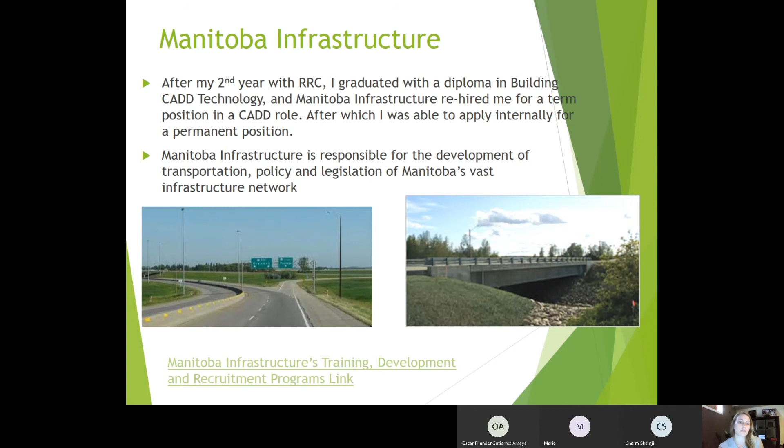Manitoba Infrastructure is broken down into 8 different areas. I work within the engineering and operations division, which is broken down into 9 different branches. My branch is construction support services.

Construction support services provides expert and experienced internal technical training, consulting, research, and evaluation services that ensure consistent quality and fairness in the delivery of highway construction projects.

Some of the services we offer are internal survey support and training, internal GIS and CAD support and training, survey technology research and design, construction audit and quality assurance, and we also have the training, development, and recruitment section under our branch as well.

When I first started with construction support services as a geomatics CAD technician, I was provided various internal training for CAD, GIS, and survey, to understand the processes of the programs that Manitoba Infrastructure uses to complete their jobs.

Now my position as a civil design technologist, this is my permanent position that I've had for the past 8 years. I perform technical development and research related to computer-aided design and drafting software.

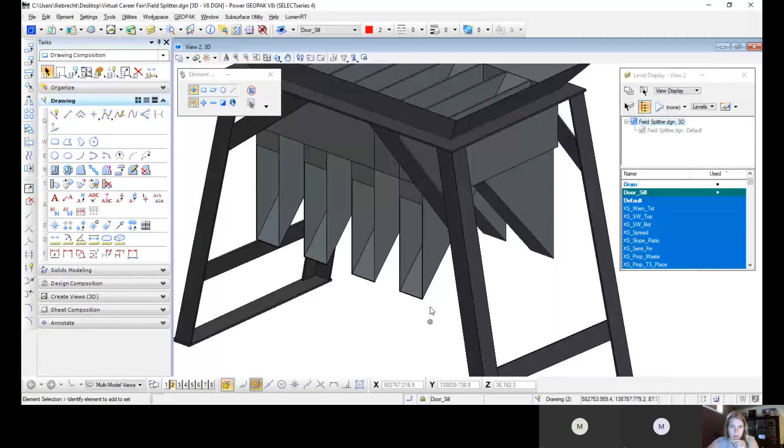I just typed it up into the chat there. I was just wondering if we were supposed to be able to see some drawings, that 3D drawing you were showing. I couldn't see anything, I could just see your slide. It didn't come up? Not for me. I don't know if anyone else saw anything. Okay, let me try again, because I can. How about now? Yes, now I can see it. You saw the PDFs though? Did you see the PDFs? I didn't see anything, I just kept seeing your slide, and I was like, am I supposed to be doing something? I could redo that, maybe, just because it is recorded, and then it'll be there for people to view. So maybe if you can just do that part, because I don't know if anyone has a question, because I feel like one was just the tech person, and now it's just Lori there. So maybe if you just want to do that so that if people are watching the video, they can actually see what it was, if you don't mind. For sure, yeah, no, I'll do it. Okay, and I'm just going to mute myself again then. Okay, so can you see this map?

Right now, I just see your desktop, and it shows your files.

Okay, there's a map. You see it now? Yes. Okay, I should have tested that part too, I guess. Yeah, that's okay. Okay, so this is a map.

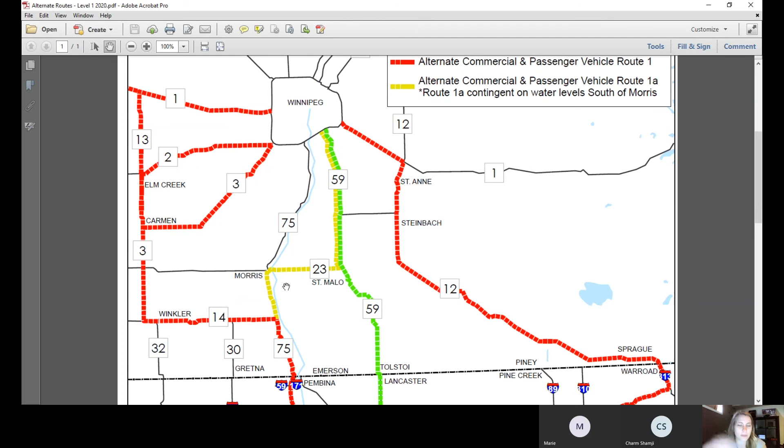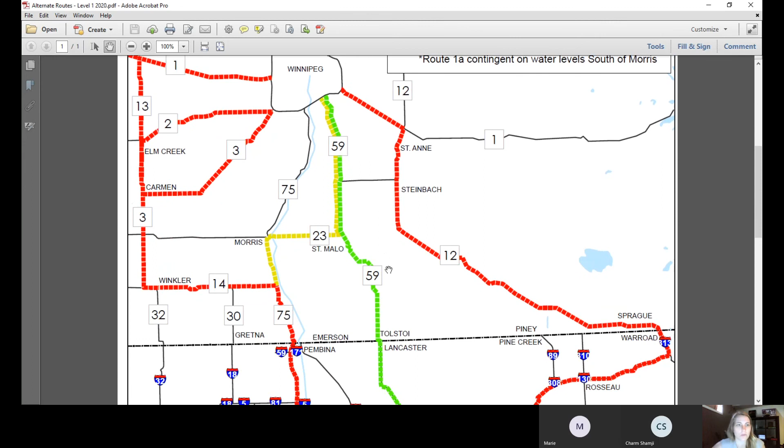This is the flood map that I was talking about. It shows the alternate commercial and passenger routes for when the flood was going on this year. The south part of Manitoba was more flooded than any other part, so they show different routes. I use geographic information systems to create maps like this, to produce them for floods, to send out to different areas of Manitoba so they know which routes are open and available.

Okay, let me try another.

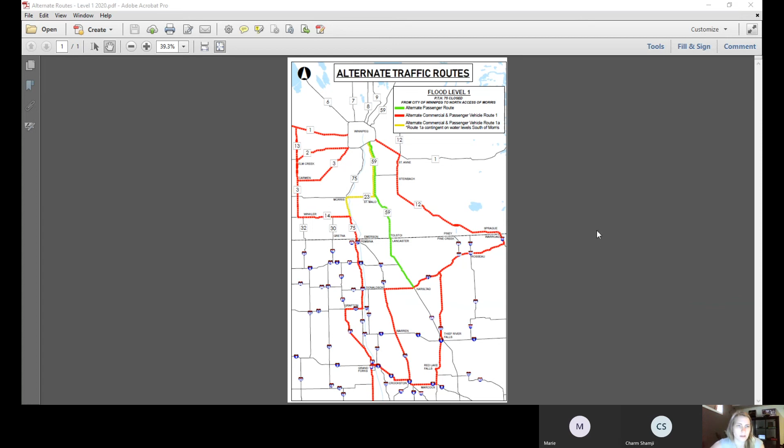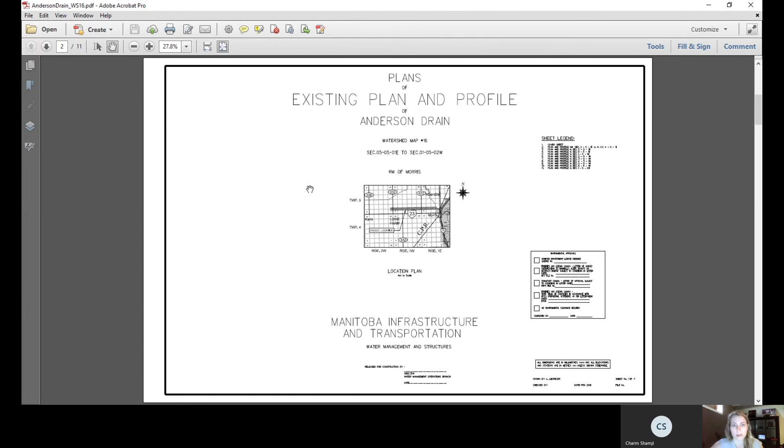Okay, so this one is the drain that I was talking about. This is more likely the project I would be working on day-to-day. It's a drain plan showing various parts. The site plan at the very top shows different details about bridges and culverts, and the location of certain things from a top view. Then we can see a profile view of the bottom of the drain and some bridges and culverts on the left and right side of the drain.

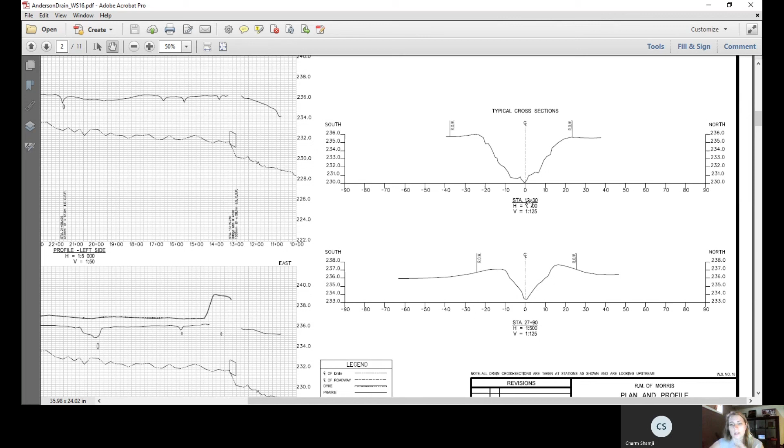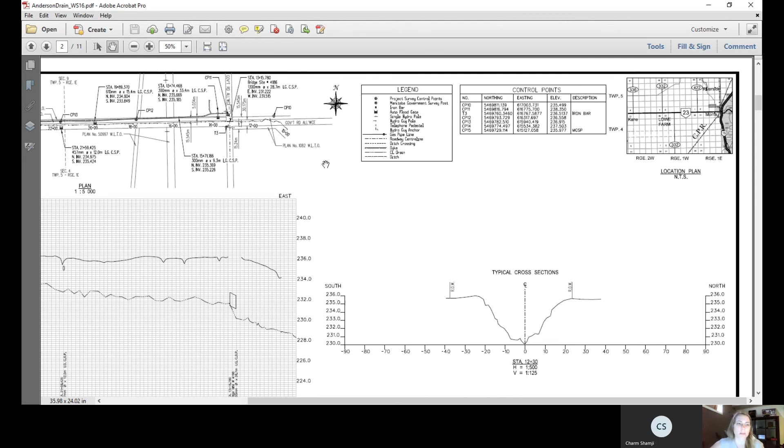Then typical cross sections, so you cut the drain and can see the banks on each side and the bottom of the creek. And then just a site plan showing where it falls within Manitoba. This one has a variety of pages because the drain was quite long. So that's a typical type of job I would do. This one's for water management.

Let's see other projects that I have. I'll bring up the 3D ones here.

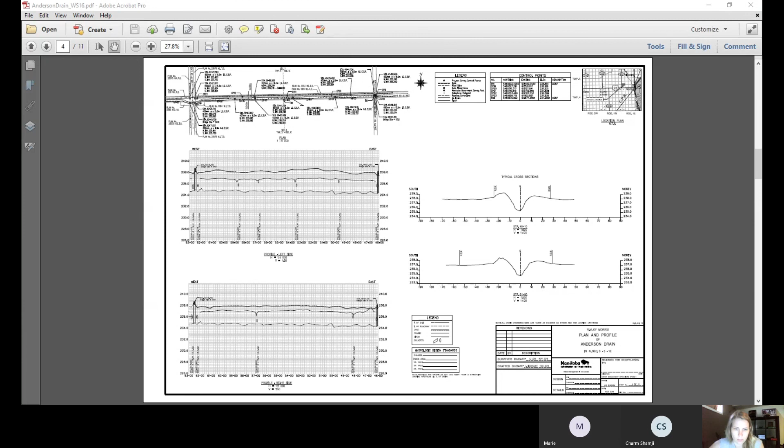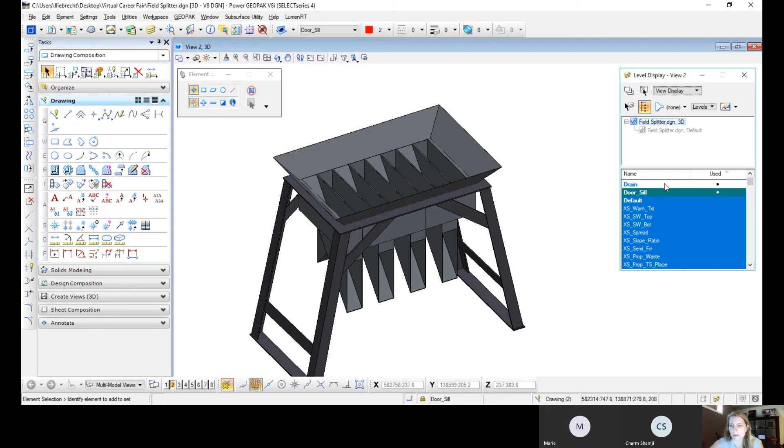So this one was the field splitter I was talking about. It's just a little 3D model I did for somebody who requested it because they were going to have it built. We're on the wrong side of it, but we have measurements and everything for the person to use, so they know how big all the parts of it are.

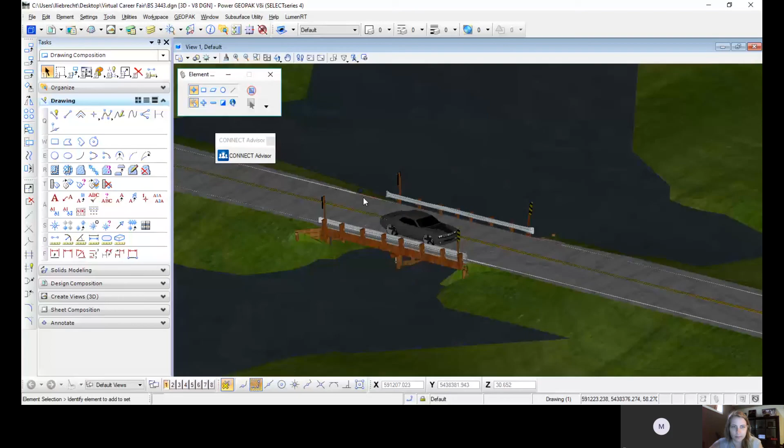So that's one. The other 3D drawing I've done - it was picked up by LiDAR, surveyors used LiDAR to pick up this data, of the land that runs all the way along this creek and the roadway that runs across it, and also this bridge here.

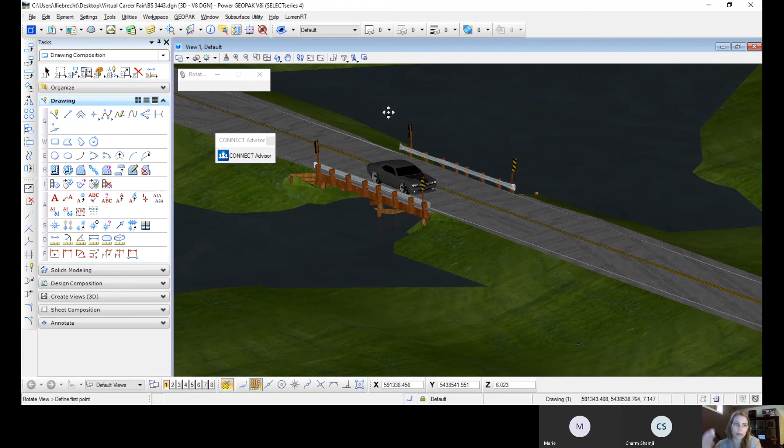I took all this data and brought it into the program we use, which is MicroStation, and created a 3D model. I did not create the car, which is what I was saying earlier - the car is just something you bring in. But you're able to create these 3D objects within MicroStation, and you can render them to have certain materials on them, so you can see the wood, the grass, the guardrail, and the water.

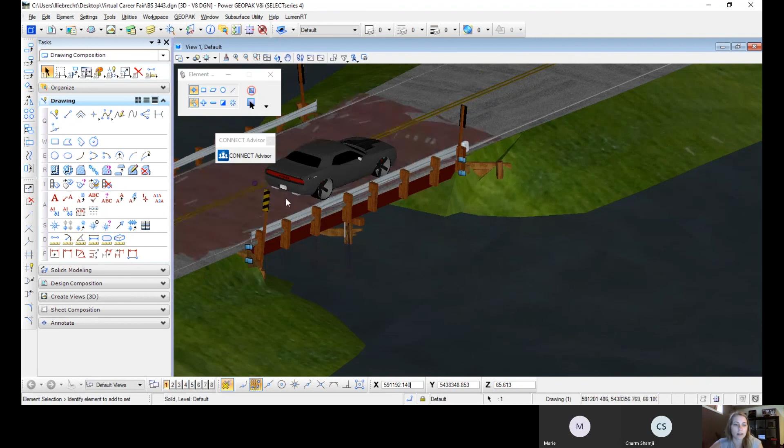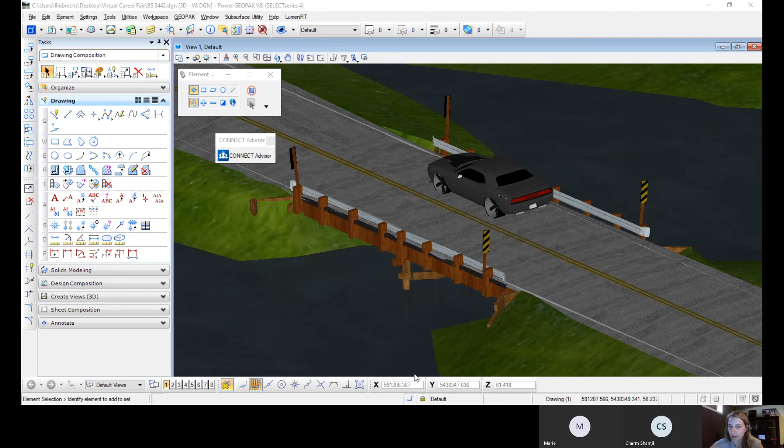So that's a little bit more of a fun project, because it's a little bit more dynamic than just a 2D site plan, profile, and cross sections. Hopefully everybody was able to see that this time, but that's all I have. So if anybody wants to ask any questions now.

I will ask just a couple questions. For sure, I feel like I ran through that very quickly. That's okay, because I think you talked through it before, and maybe I should have interrupted initially and said hey, I don't see it. And then maybe it would have made - but anyways, we heard it and we referred back to it, and thanks for doing that.

You had mentioned that when you were at Red River and took your civil engineering technology program, there was a co-op program. And what I'm wondering is, do you feel as though that co-op program was helpful, being able to take what you learned in the classroom and apply that knowledge to the workplace? Was that beneficial? Very much so, yeah.

So the way they set it up is they have a website that all the students go to, with the companies that have applied to have students come work for them. The companies know they're hiring students from the first year or second year program, so they're told which year you're coming from, and they're aware of how much knowledge you'll come with.